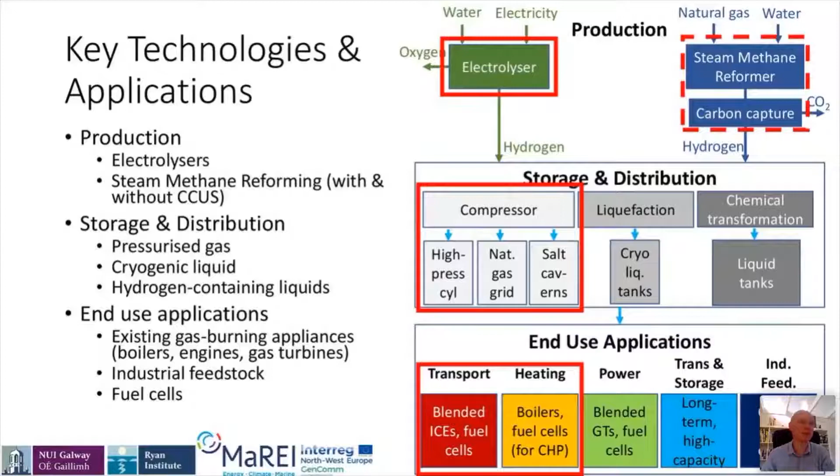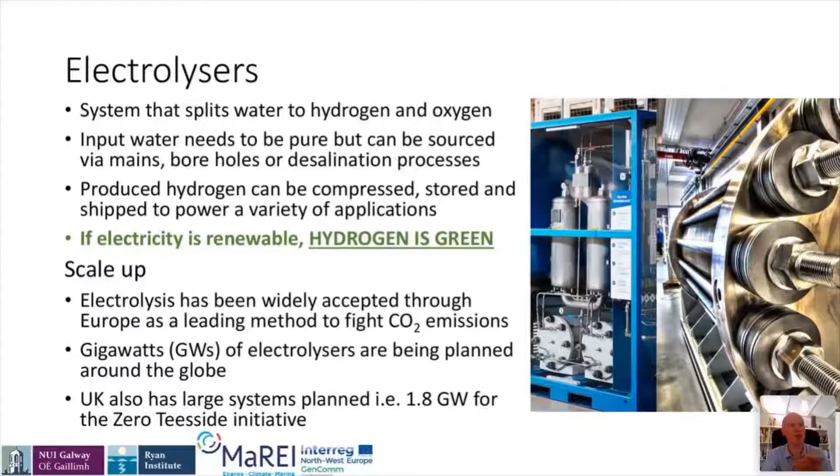Okay, so I won't go into much detail about the electrolyzers. Ian talked about them, but they are scaling up. And what I'm going to be presenting to you is electrolyzers that are within the bounds of current electrolyzer technologies. The case studies I'm showing don't rely on any new technology to be developed or any major scaling up of existing technology. We're just talking about what are the practical low-hanging fruits for Northern Ireland.

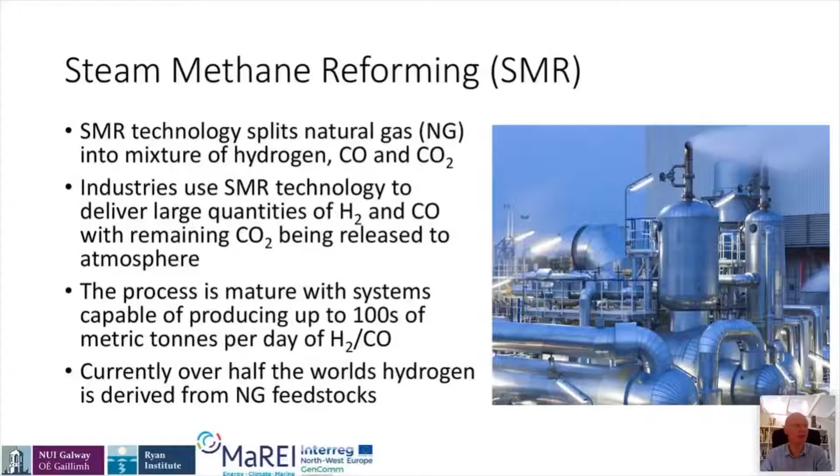Steam methane reforming is how about 90% of the world's hydrogen is produced today. And when you combine CO2 capture with steam methane reforming, we have what's called blue hydrogen. And as I said, this is being considered in the UK, and there's a number of projects being brought on stream benefiting from the UK's large-scale natural gas resources under the North Sea. And this is really being seen as a bridge for hydrogen production to the future, where it would be predominantly green hydrogen.

Salt cavern storage, again, just to summarize, because we're going to refer to this later. There's salt cavern storage being identified within Great Britain, and there are conversations underway to see how this would fit into the Northern Ireland context.

And again, just keeping in mind the location of where these salt caverns are, in the vicinity of Belfast, near where the gas interconnection with Great Britain comes from, near where the electrical interconnection with Great Britain comes in, and also near the coastline, where there could be deployment of offshore wind farms in the Irish Sea between Northern Ireland and Scotland. It's really in a very, very exciting location.

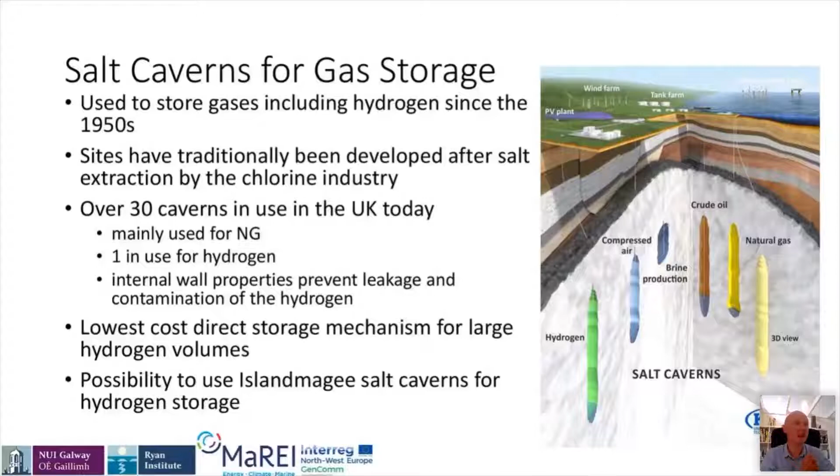Another key technology in the mix: we've talked about hydrogen production and hydrogen storage. Let's talk about hydrogen end use. Buses, urban buses in particular, have been the big first large-scale user of hydrogen so far, and there's a number of technologies out there.

And right up there at the top is Northern Ireland's Wrightbus, and that's the bus identified in the middle picture here. If you've got good eyesight and look really close, you'll see the word Belfast is written there. This is one of 3 hydrogen fuel cell double-decker buses that is currently driving the streets of Belfast. I'll talk more about that project later.

And again, for the truly eagle-eyed, you'll see that there's the Bus Éireann logo on the side of this bus, and this is a single-decker Caetano bus that James Carton was involved in bringing to Dublin for a 2-month-long trial, and that's led to an expanded pilot operation now of 3 Wrightbus double-deckers in Dublin, which will be starting any day now. So there's a number of other manufacturers out there, but I just wanted to highlight some of the key ones.

Down at the bottom here is a particularly exciting opportunity given how intercity transport is done on the island of Ireland. This is the first prototype hydrogen-powered coach by Dutch company Hyzon, and they're developing these in a joint venture with an Australian manufacturer. So the technology is moving along.

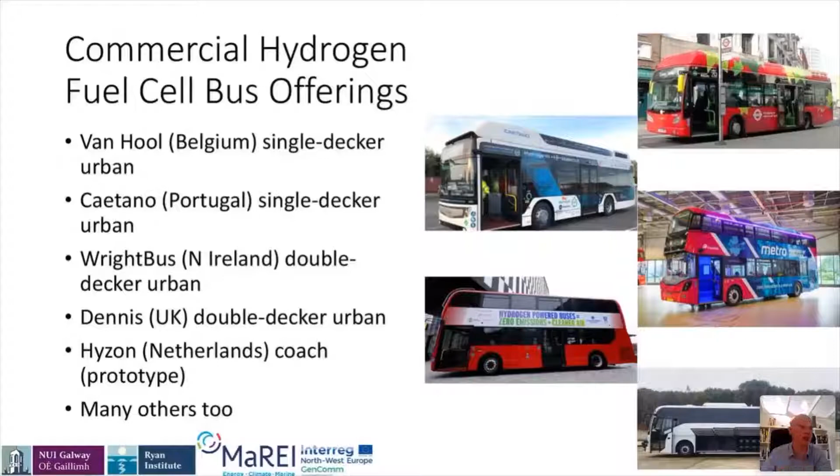Just re-emphasizing what the EU's position for hydrogen is. Paul McCormick mentioned this, that there is a prioritization of decarbonisation strategies where, quite rightly, energy efficiency is top priority. The cheapest form of energy is that which we don't use. Circularity, which means deriving energy from waste products, and essentially reducing the amount of waste in society overall, not just energy. Direct renewable electrification, so personal mobility, domestic heating, new build homes, all of these are suitable for direct renewable electrification.

And then for those sectors that are hard to decarbonize with electrification, efficiency and circularity, we have the clean fuels. And most of these are based on a building block of hydrogen. So these would be fuels like sustainable biofuels, all of which need to be hydrogenated, using pure hydrogen itself, using fuels in conjunction with carbon capture and storage. So this is essentially the hydrogen route, and this would be for maritime, aviation, industrial heat, heavy duty transportation, heating, but for buildings that are not new, buildings that are maybe not suitable for the depth of retrofit that heat pumps require.

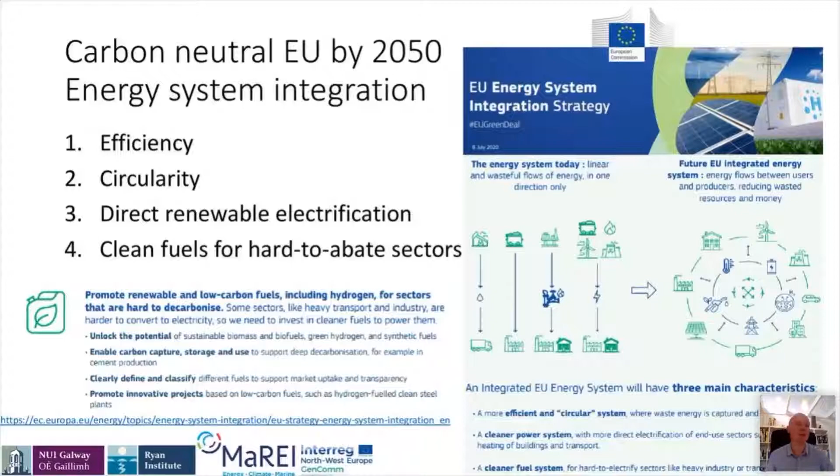So this is supported at a European level. And as Ian said, the European Union plans to have 40 gigawatts of hydrogen production by 2030. And that is about 7 to 8 times peak electricity demand on the island of Ireland at the moment. So a significant amount of electrolyzer capacity for the continent by 2030.

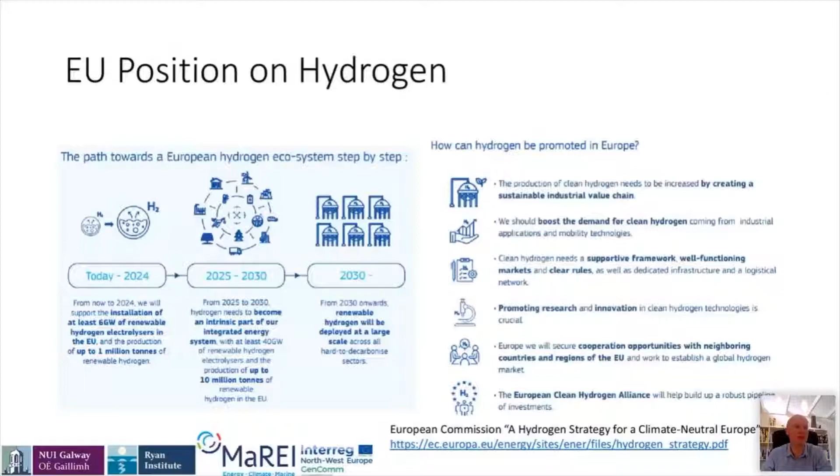Looking then at the key jurisdictions for policy. So Northern Ireland is obviously at the interface between the United Kingdom and the European Union, and so policies in both jurisdictions become important. The European Union has really targeted green hydrogen. Now, the role of blue hydrogen is certainly recognised, but it's really in the UK that blue hydrogen has got more of a central role in energy planning and decarbonisation planning going forward.

When I talk now about our case studies, our scenarios for Northern Ireland, we're going to be focusing exclusively on green hydrogen, because in our opinion, when we were writing this piece for the Department for the Economy, Northern Ireland really just has so many natural advantages in terms of green hydrogen that to us, adopting blue hydrogen within Northern Ireland itself would maybe not be playing to those advantages quite as well.

So the key scenarios that we're going to focus on are a couple of heating decarbonisation scenarios and a couple of transport scenarios. Why heating? Why transport? Well, heating, we have a very modern gas grid, both within Northern Ireland and across the island of Ireland, where the distribution network, the last few kilometres up to everyone's homes and within towns, is all plastic. And plastic piping can handle 100% hydrogen.

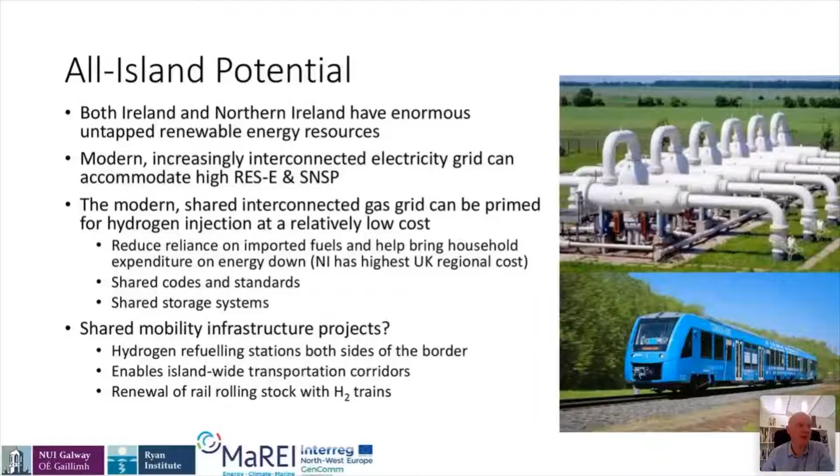So what are our scenarios? We've got 3 families of scenarios. The first one is distributed hydrogen production. Now, why are we talking about distributed hydrogen production? Well, this is the way that current support for green hydrogen as a transport fuel pushes developers. In order to qualify for the renewable transport fuel certificate, the RTFC in the UK, hydrogen needs to be verified to be green. And how it's verified to be green is that it has to pass 2 tests, essentially.

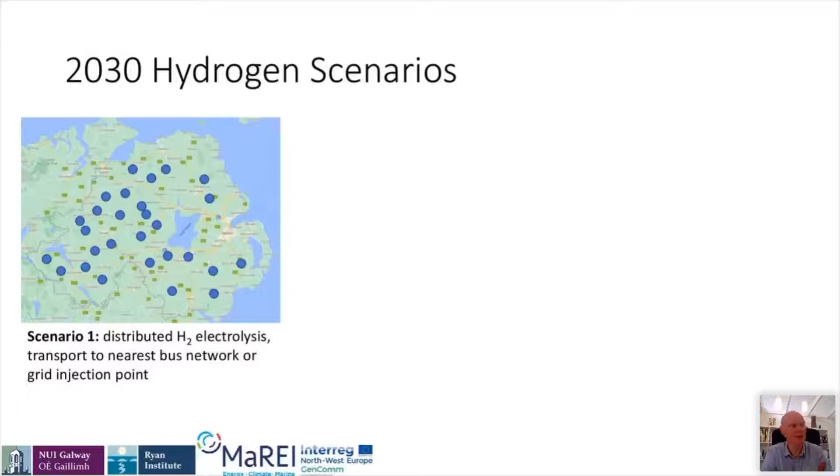The first test is: is it directly connected to a source of renewable electricity? So that really pushes hydrogen production for transport out to the site of electricity generation. So that's really what this scenario is looking at. The second condition that green hydrogen has to pass to get RTFC support is that the electricity supplying the electrolyzer has to be additional. That means we can't be taking electricity that was otherwise going to the grid. So we're basing our analysis here primarily on the use of curtailed electricity, so curtailed and constrained electricity that doesn't get onto the network because of local or nationwide grid constraints.

The second scenario is try and benefit from economies of scale. We're going to see when we look at the distributed analysis that producing hydrogen in many, many small scale locations is quite expensive, especially when we start to factor in transportation costs of getting hydrogen from these remote locations to some use center. It starts to get expensive. So what if we did it regionally? So we've identified the region in Northern Ireland up around Derry and the North Coast, where we have the best wind resource. We have a grid that is potentially not as strong as it could be, and enables the use of some of the dispatch down, the curtailed and constrained electricity.

In this scenario, we are identifying 2 sub-scenarios, one where the hydrogen is brought towards Derry to fuel trucks and buses, and another where the hydrogen is injected into the North Coast gas grid and used to supply from the North Coast between Coleraine, Derry to Lifford. Sorry, Strabane, wrong side of the border. And then the last scenario is what we're calling centralized. And this is really benefiting from this geographical advantage that I spoke about earlier. Salt caverns, proximity to Belfast, proximity to gas and electricity interconnectors, proximity to potential future offshore wind farms.

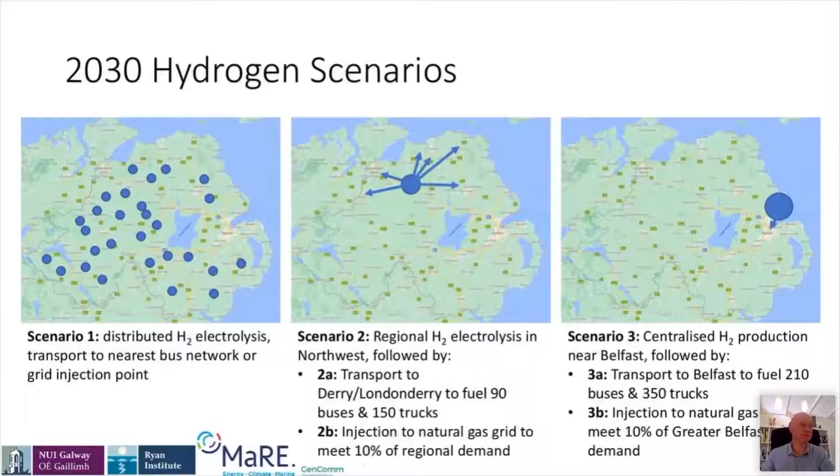So how did we estimate the demand that would be required for each of these scenarios? Well, we looked at fleet turnovers. This was really where James Carton's expertise in Dublin City University came in. James, as I see he's posted there, is working with transport haulage companies, trucking companies, working out their ability to move towards hydrogen as part of a decarbonisation strategy. And we looked at fleet turnovers, the impact of diesel bans, and used some projections coming from the EU of fleet turnover. And we come up with high, medium, low scenarios for the turnover of urban buses to hydrogen in Northern Ireland, which is this top graph, and in heavy duty 40-ton trucks. And we picked these technologies because they are available right now.

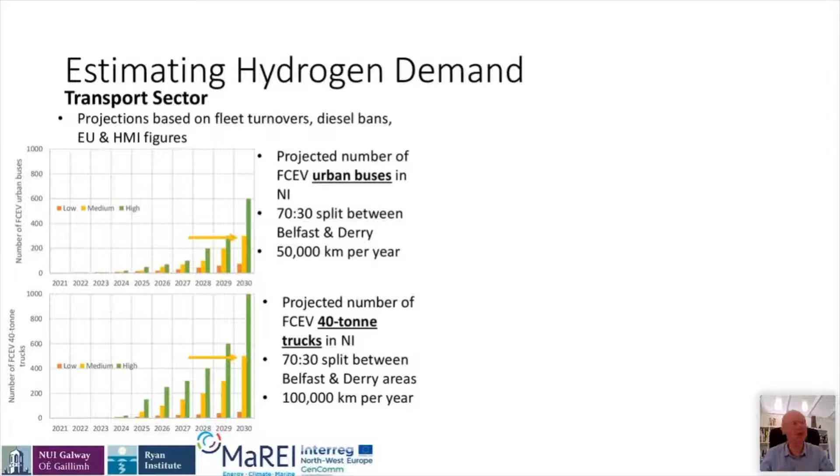Within the gas grid then, we looked at offsetting 5% of the gas usage within the northwest between Coleraine and Strabane. Strabane is currently being connected to the gas network, and then also 5% in the Greater Belfast area. And these statistics were all available for 2019, so we used those to scale our demand.

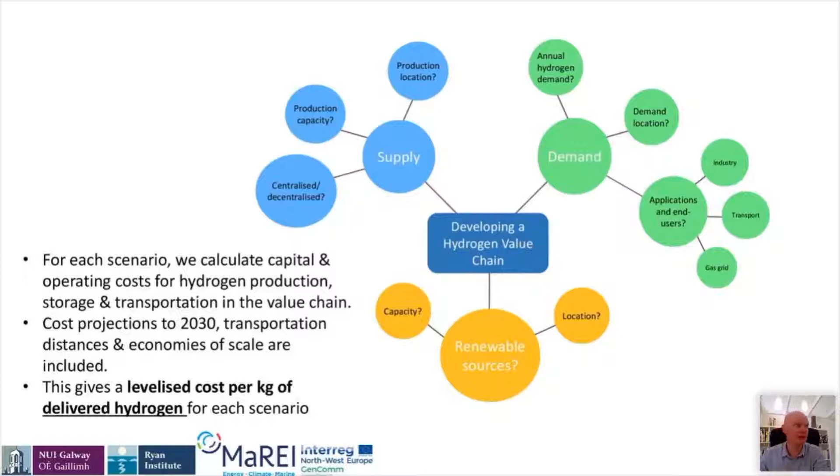What our work then, which has been developed as part of the GenComm project, is on building up the hydrogen value chain. So putting together our scenarios for supply, putting together our scenarios for demand, developing the value chain, and developing costs, developing decarbonisation, carbon abatement numbers. And we can optimize this, and we come up with an end delivered cost of hydrogen when we include everything from the capital expenditure, the operating costs, etc. So this summarizes our end results, and I'll put some of these numbers in context for you in a moment. When we look at the distributed scenario, when we're generating hydrogen at wind farms across Northern Ireland, we end up with a large number of quite small electrolyzers, so around the megawatt range.

And this gives us hydrogen production costs on the low end, which are very, very competitive. This must be in areas with lots of curtailment, where there's a large resource of essentially free electricity, up to £12 per kilo. Sorry, I might have said euros earlier. £12 per kilo. This is very, very high, and it would struggle to be cost competitive. Transportation costs, again, can be up in the region of £2, and this just reflects how remote a lot of these locations are and how we would have to do continuous collection of hydrogen at different positions to get it

to an end use. We look then at the regional case, and when we're looking at transportation, we end up with getting a 10 megawatt electrolyzer. When we look at heat production at this 5% offset rate, we get a 7 megawatt electrolyzer. We've kept our hydrogen production costs quite low here, and the range here reflects the fact that it's difficult for us to know exactly how much electricity will cost in 2030. So we put in a low cost price of £36 per megawatt hour and a high cost price of £72

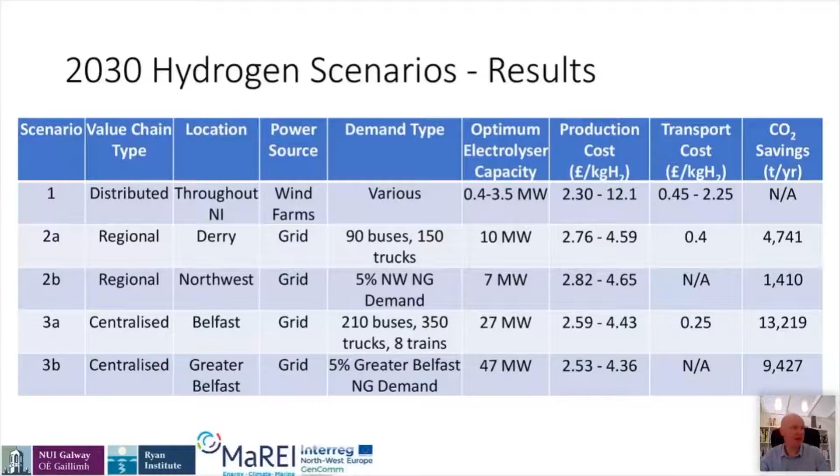So putting some of these in context, in the transport scenario, the minimum delivered cost was £2.60 per kilo for Belfast. If we put that into energy content of diesel, that's 79 pence per litre. Now, we're not saying that you can go to a pump and buy hydrogen at the equivalent of 79 pence. What we're saying is that the production cost of hydrogen is not a multiple of the selling price of diesel. It is in the right ballpark. So this is what's called a levelized cost. This is not a sale price indeed.

There is a ban on new diesel buses in place, so the existing fleet will be driven. They will not be replaced with diesel only. They'll be replaced possibly with hybrid or with battery or potentially with hydrogen. It's difficult to get battery buses to do all the things that diesel buses are currently asked to do. If the hydrogen is produced in a way that satisfies the renewable transport fuel obligations, there is a subsidy. It varies because there is a marketplace for these certificates, but it's roughly in the region of £5 per kilo. So again, there is quite generous support available in Northern Ireland if the hydrogen is verified green.

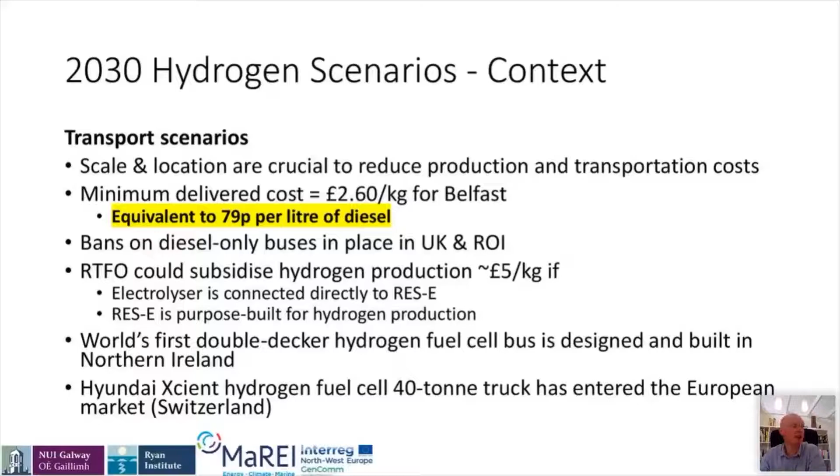Some other drivers for this: hydrogen double-decker buses designed and built in Northern Ireland. And then 40-ton truck technology is being rolled out in Switzerland, as James and Ian talked about earlier. On the heating scenario, minimum delivered cost again for Belfast, but Derry was not too far behind, £2.50 per kilo. It's the equivalent to 7.5 pence per kilowatt hour. Just to give context, this is more expensive than the average domestic price in Northern Ireland in 2019. It was about 5 pence per kilowatt hour.

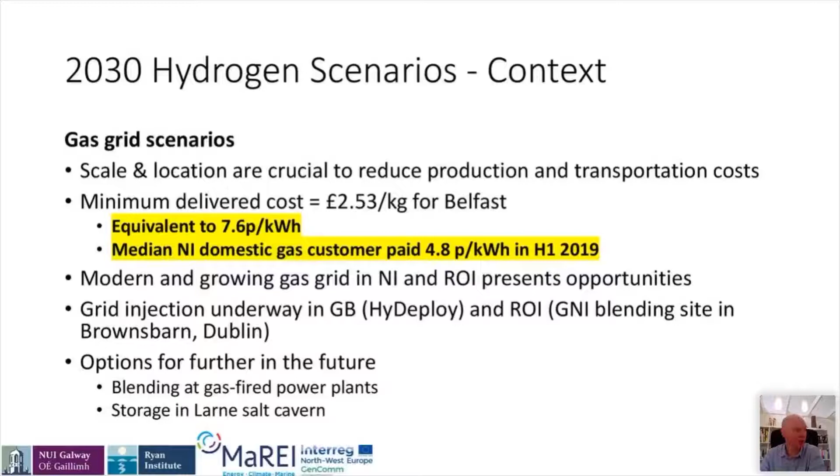So it would suggest that if we're going to go the heating route, there needs to be greater support for hydrogen than there may need to be for the transportation route. But as we said, moving large amounts of hydrogen with a gas grid is much more desirable than moving large amounts of hydrogen by tank or truck on the roads. We have gas-fired power plants across Northern Ireland, and again, we have the salt cavern storage.

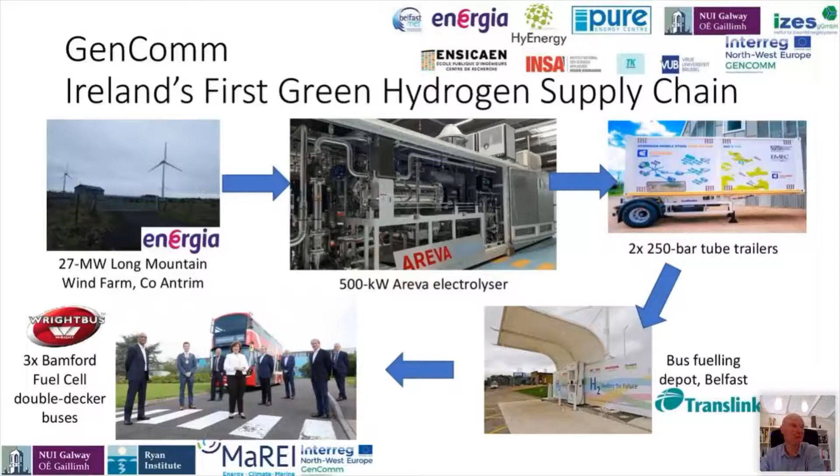So just sort of mentioning GenComm, this work is underway. All of the elements of this first green hydrogen supply chain on the island of Ireland are either in place or they're currently being built right now. The electrolyser is being positioned at Long Mountain Wind Farm in County Antrim. The tube trailers to bring the high pressure hydrogen into Belfast are in place. The filling station at the Translink depot in Belfast is under construction as we speak, and the hydrogen buses are in place driving the streets of Belfast. So this is now starting to happen, and what we're proposing is effective and efficient ways of rolling this out.

Some really exciting news, just to maybe motivate some action on this: about 3 weeks ago, ESB in the Republic here announced that the Moneypoint 1 gigawatt coal-fired power station will be closing in 2025. This was expected for some time, but what wasn't expected was the breadth of the ambition that was announced for that site. The site itself is a key nationally important piece of infrastructure. It's got a 1 gigawatt interconnection directly from Moneypoint, which is on the west coast of Ireland, to Dublin. It's the deepest port in Europe, which is currently used for offloading coal from South America.

And what ESB in a joint venture with Equinor from Norway are doing is that they'll be repurposing the site as an offshore wind farm construction site. They'll be using it as the landing point for the cables that bring the electricity. They'll be sending the electricity directly to the big load center in Dublin, but they'll also then be using hydrogen production and storage to balance out that supply and in some cases exporting that hydrogen to mainland Europe.